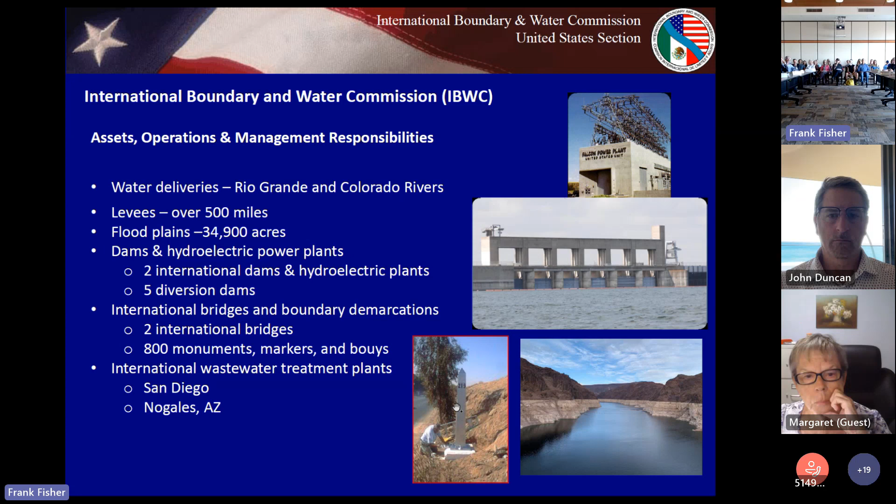The San Diego field office is located within the fence line of the wastewater treatment plant, and most of our time is spent managing the plant, making sure it's operating properly and being maintained, and also the prevention and response to transboundary flows. We have a staff of 5: an area operations manager, a civil engineering position in charge of overseeing the plant, and I have 2 civil engineering technicians.

One of my technicians is here. I want to introduce you - it's Lonnie Connors. Raise your hand there. He's one of the guys that makes everything happen.

Our preference is it does not pump to the International Collector, because a lot of the flow in the river contains treated water. There are two secondary wastewater treatment plants in Mexico, and they dump water into the river, so about half of this flow is already some level of treatment. We don't want to waste our wastewater treatment plant treating treated water. So our preference, and this is how we want to operate, is any flows coming from the river go to pump station PB1A, which bypasses the treatment plant.

So pump station PB pumps to the PB1 pump station or the International Collector. From the International Collector, about 25 million gallons is diverted to the wastewater treatment plant. And then what is treated at the plant goes through this pipeline, the land outfall, and it drops about 190 feet down, turning into the ocean outfall, and is discharged about 3.5 miles off the coast.

The treatment plant is designed and permitted to treat 25 million gallons per day. That treated wastewater is then pumped through this pipeline here, called the South Bay Land Outfall. It reaches a point where there's a structure, then drops in the pipeline 190 feet down into the South Bay Ocean Outfall, where it's further discharged 3.5 miles off the coast.

Yeah, typically down here the discharge is probably 35 to 45, maybe 50 million gallons per day. It varies, but it's a lot.

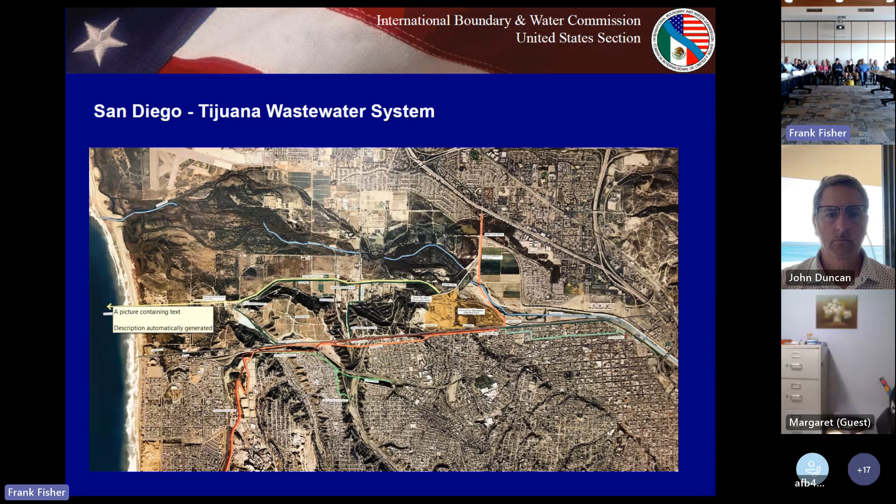All right, so some of the challenges we have. Biggest challenge is the population growth in Tijuana, estimated about 2% per year. And here's a chart that shows the population increase from 1950 up through 2035. So you can see, and that picture over here, this is a typical neighborhood. You know, people will just build houses wherever they can.

I'm pretty sure none of these houses are connected to a sewer system, probably no trash collection. So when it rains, this is the source of a lot of the pollution, and this is liable to be an ongoing problem. So again, 2% per year is forecasted.

57% for 2020. Infrastructure not keeping up. Correct, infrastructure doesn't keep up. Existing infrastructure is overwhelmed, new infrastructure isn't being constructed. All of that.

No, that's the population growth. So there's probably a portion of that it's as a neighborhood, but I think a lot of them probably don't, because of the continued anticipated population growth rate versus no infrastructure improvements, insufficient infrastructure. I agree.

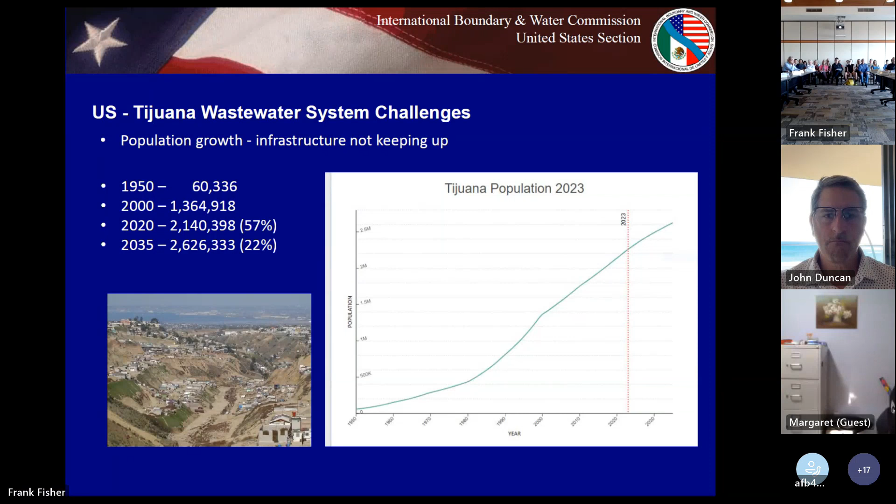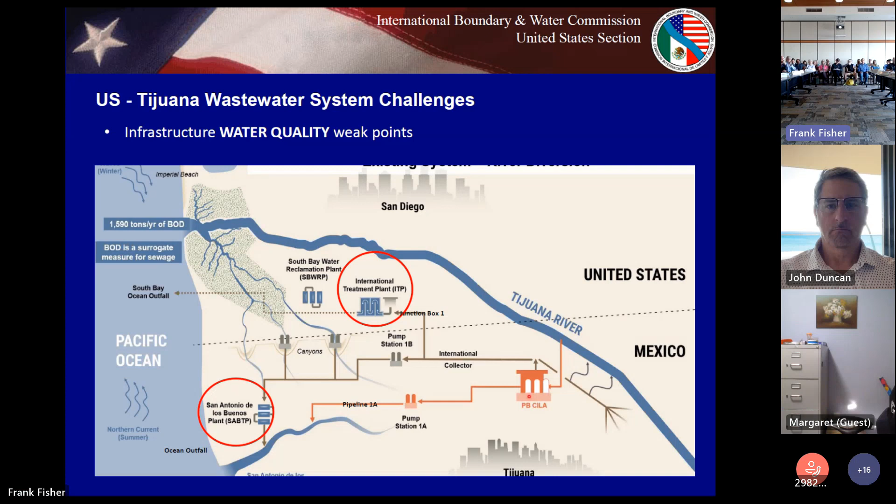Okay, here's the weak points as far as water quality. The slide before that had to do with the flow. So for water quality, we have the International Wastewater Treatment Plant. It's overloaded. We've lost our primary treatment capacity because of the excess flows. It brought in excess trash and rags, and it fouled up the systems and the mechanisms. We're in the process of contracting out the cleaning and repairs of those. And of course, we have the inoperable plant in Tijuana down at SAB.

All right, now we can talk about the plant. The plant is designed and permitted to treat 25 million gallons per day. You can see in the chart on the right, those are the flows per month over the last year, and these flows tell the story. In July 2022, pipeline PB1A was operable. Everything was great, we were getting flows less than 25 million gallons per day. The pipeline broke July 31st, and since then we've been getting an extra 5, 6, 7 million gallons per day, and it's taken a toll on the plant. You can see that from August through December. Now in December, it started going down, because we started getting rains in December. When we get the rains, PB shuts down, which means there's less flow to the treatment plant. And we do it.

Bypass. Is there a certain range where the biodigesters just don't work and you have to bypass? How much flexibility do you have?

So how much flexibility do we have to redirect the flow? How much variance can you accept, or is it just at 25 million gallons you have to bypass and let it go? The question was, what do we do if we get more than 25 million gallons per day? How does the process work? Do we bypass the secondary or whatever?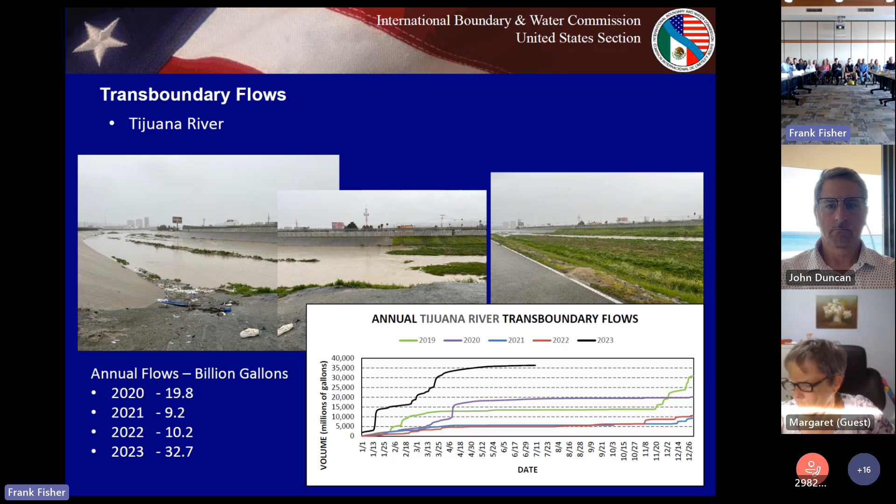Solids come out of the wastewater - they're sludge. So at the end of that treatment, the sludge belongs to Mexico, and they have trucks every day, from 5 to 10 loads a day. They haul that sludge down south into Mexico, and they have a landfill near the old SAB where they spread it out. They mix it with dirt and spread it out, and whatever else happens there, that's all theirs. We're not involved with that at all, but the sludge belongs to Mexico, and they haul it off.

Extensively, and there is a material that is not natural. If you look at it, especially in Goat Canyon, it is super fine. In projects that we work on down there, we've tested it, and basically it's not a natural occurrence - it's not sand, gravel, or cobblestones. It's super fine. I believe it's man-made, some type of sludge.

And then as you go up into the other river channel that goes towards Tecate, if you go through those rivers, there's ponds from developments that you can't even walk up to. But during the rains, there's no stopping that from coming down. And if you go to the mouth of the sloughs right now, it is black - it really is pretty foul, and it goes from the mouth of the sloughs all the way back up to Hollister Road. You sit at Hollister and you smell it.

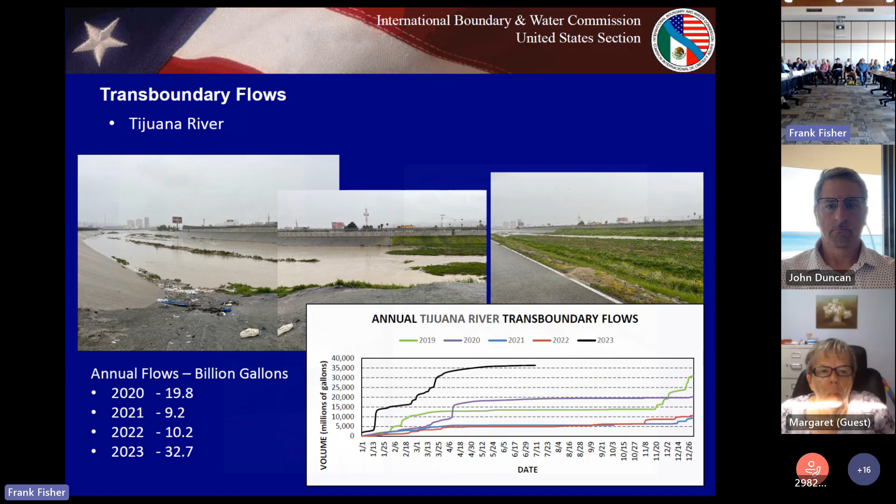I visited the sludge site about 2 weeks ago personally. They mix it in with layers of alternating sludge and dirt, loose material that's there. The comment was that since this is in the desert, they might be able to use it in construction because it's compactable material. But you can see from Google Earth, next to the ponds, piles of what is sludge, layered up. I'm not a scientist, but I see a slope, and I see the ocean less than a mile away, so surely some of that gets there. But from a very uneducated eye, it didn't seem to be anything like the quantity of the sewage that's actually hitting. So in terms of where you're going to put your effort and energy, the sludge is not good, but it's not the biggest problem.

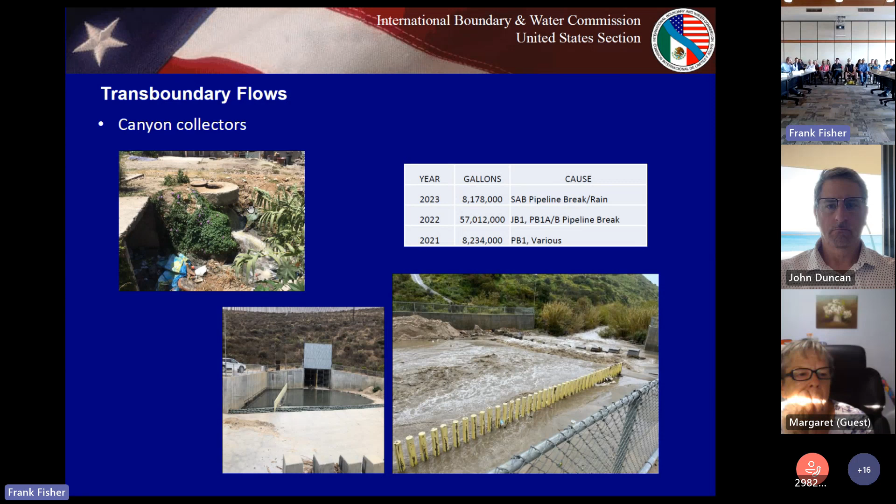So anyway, 2 events had minimal transboundary flows to our canyon collectors. These pictures show a typical source of flow. This is a manhole, and there's probably some rocks or sediment in the pipeline causing it to overflow out of the riser.

Okay, I took pictures of each of our 5 collectors yesterday, and this is what they look like. This is Stewart's Drain—a typical flow we see every day, all year round. I include this photo only to show that Border Patrol was replacing the gratings instead of the typical horizontal and vertical bars. They're using this honeycomb design, which is supposedly harder to cut through.

This is Silva Drain. All of our canyon collectors, we've added sandbags. This is a requirement during dry season, at the beginning of dry season, to give extra holding capacity to these canyon collectors.

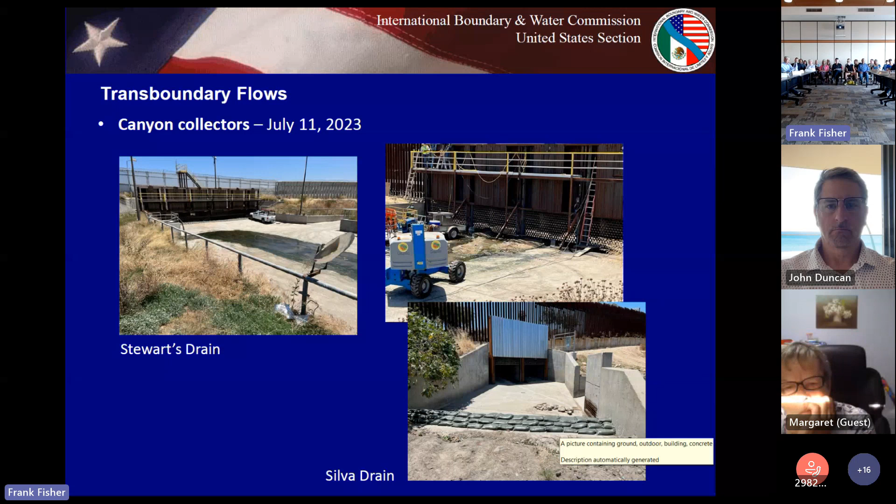And these are the other ones: Canyon del Sol, no flow. Smuggler's Gulch, no flow. Goats Canyon—this is the only one with any significant flow, but you can see it's contained and going to the plant.

Okay, so what we do to respond to or prevent transboundary flows—we have some pumps that, if one of our collectors has a lot of flow, we'll bring in to speed up the pumping and diversion of flow to the plant.

And then we have our sediment berm. Typically at the beginning of the dry season we put this berm up, and it holds the peak flows. This year we've had some trouble getting the sediment berm in place—the flows have been too great—but it's going up tomorrow, and we'll see how it goes with the peak flows. It might be tight, but we're still getting a lot of flow for a sediment berm, and that's one of our main prevention methods, and it's been really successful over the years.

Okay, projects: the JB1 rehab—remember that was the junction box where the valves were inoperable, so we couldn't control the flows. That will be awarded anytime now.

We have a future project for sediment removal in the Tijuana River Channel—we probably have quite a number of feet of sediment in the river. And the levee restoration: here's the Tijuana River channel, this is our north levee, which belongs to the IBWC. There's also a south levee, and this needs to be raised. This picture shows that after one of our rains, there's not a lot of elevation difference between the water level and the top of the levee, so the plans are to raise that.

Minute 328 was an agreement between the U.S. and Mexico for a number of projects. In the United States, that included the expansion and rehab of our wastewater treatment plant, with the goal to double the capacity to 50 million gallons per day. It also includes some rehab necessary to make the expansion successful.

We are still working the numbers on that. We do need more funds, and we're still working on the scope versus the funding sources. We do expect to go out for design bids by the end of this year and award the design portion to a firm the first part of next year. We're looking at one year for design, then two to three years for construction, so that takes us out to about 2027.

In Mexico, there's a number of projects. Some of these we helped fund, some are funded by Mexico. I can say they're not all funded, but the main projects are rehab of PBCILA, upgrading the pumps, which increases reliability, and also rehabbing pump station PB1, again replacing pumps for reliability.

There is a project to rehab the international collector, which has that crack, supposed to start this summer. Repair pipeline PB1A - if we get that online, it'll solve a lot of our problems. We're still pushing to have some kind of date to start that. Right now they're talking about a year from now, which is really unacceptable to us. This has probably the highest level of attention to get that started.

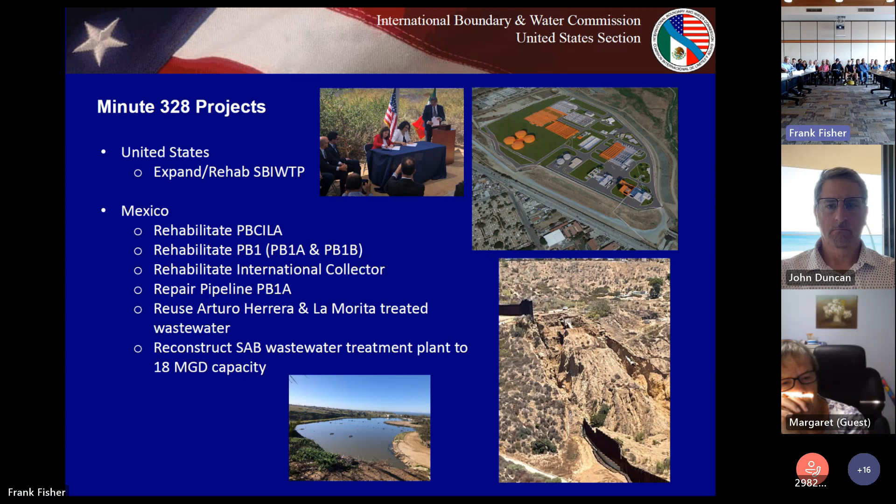We also want Mexico to start reusing that treated water instead of dumping it into the river and adding to the load on our plants. And then there's a reconstruction of the wastewater treatment plant in Mexico, increasing that from 12 million gallons per day to 18. That is supposed to go out for design this fall. So that is a project that is going to happen, and it should be online in 2026. So there's a lot of effort going on, and I think I will stop there.

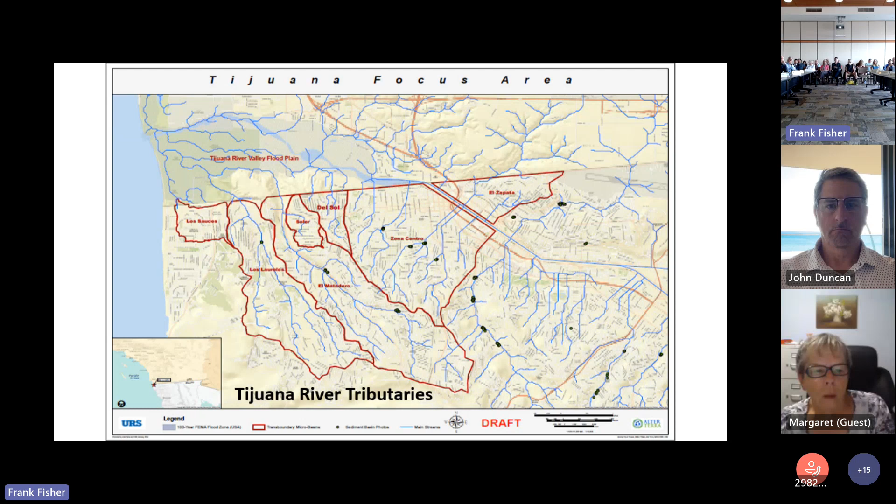I'm going to show some maps to reiterate why we're getting all this trash. These are the tributaries that connect to the Tijuana River. At one point we needed to correct this because the maps were done wrongly — we needed to incorporate all the changes in topography that happened in Tijuana over the last 20 years. So this is the new map, showing the Tijuana runoff infrastructure. I wanted to put the two maps back to back because this one mimics the tributaries — in other words, these tributaries are being lined with concrete, and that's one of the reasons why we see all this trash.

The velocity of the water increased dramatically. You see all those dots on the map — they represent the sediment basins. There are 26 around the city of Tijuana, and that shows progress. However, now people are dumping trash in the sediment basins, which were not designed to handle trash, only sediment. So that trash ends up in the main river.

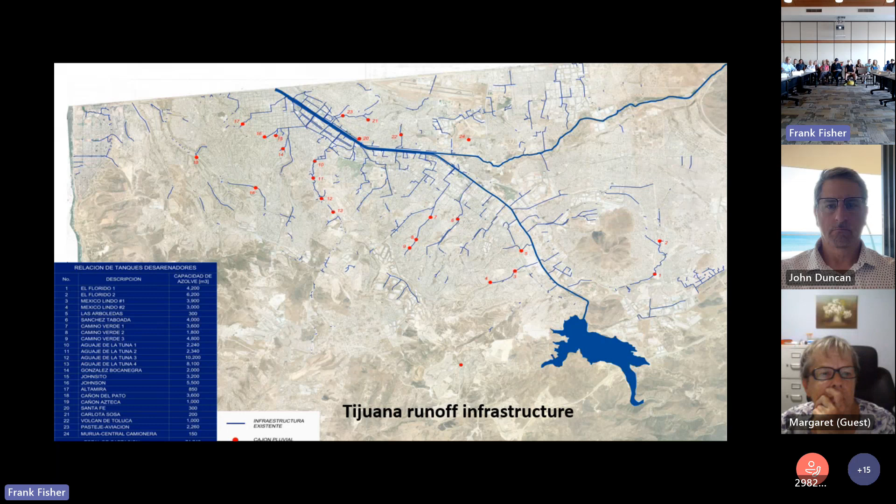We did this map at UCSD in 2007, when the population was below 2 million, and the footprint of the city was this. Nowadays the footprint is a lot larger — it's passed these hills over here, and it almost reaches the city of Tecate, which is around here.

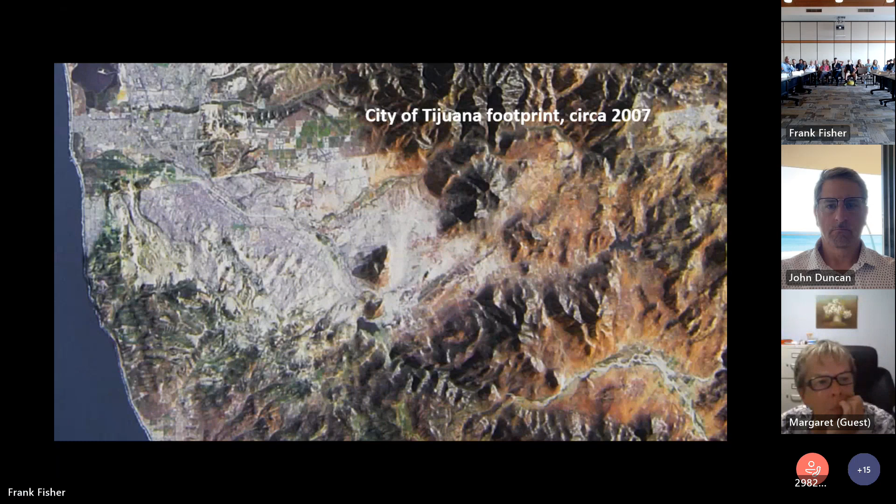And then this is the Rodriguez Dam — now totally surrounded. The river is the lowest point in this hydraulic topography of the city of Tijuana, so everything connects to this area. As you can tell, this is Playas de Tijuana, and this area remains empty, which means that whatever you put in a channel or in the soil ends up in the Tijuana River eventually.

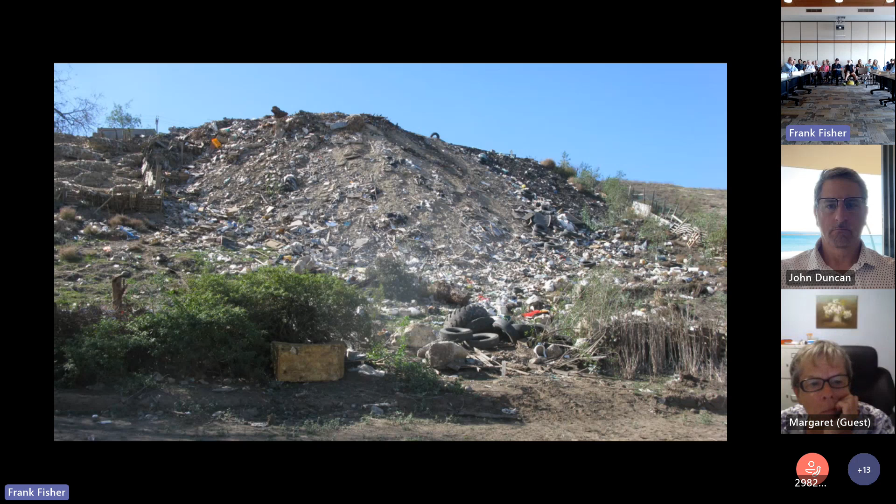This is one of those smaller maquiladoras, large maquiladoras. They mostly behave well - they collect the trash, recycle it, or transport it to the landfill. Smaller companies that serve those maquiladoras are under the radar screen, and they just put the trash behind their property, almost always in a canyon, in a creek.

This is a typical example of something that has happened since after the war ended. Tijuana has been growing pretty fast, and most of the neighborhoods are the product of illegal acts of urbanization, no permits. It's cheaper actually to build and then ask for forgiveness. So there's a process - you go back and say, I didn't ask for a license. Okay, you pay the fee and you get a license afterwards. So when you see these neighborhoods being developed, immediately you see trash deposited in every place.

We know a lot about trash. We've been studying trash for a long time, so we know everything, where we can find it. We have maps of all the illegal dump sites. We know exactly what is in there, and we make observations - it's very hard to measure the amount of trash, so it's only through observations. We cannot gauge it like water. It flows, but it's difficult to separate.

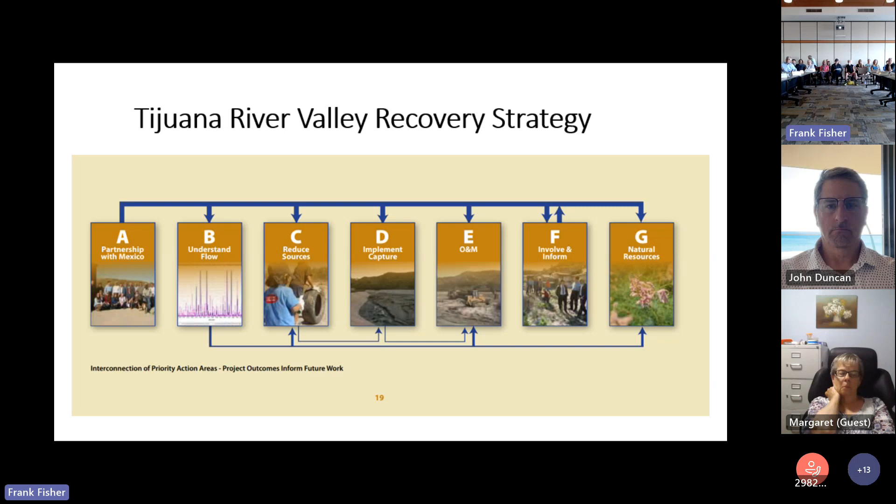It's going to take a while. I'm going to explain more about it. Capture it before it crosses the border. Then we need to find resources in Mexico to maintain and operate landfills. We want to inform the community in Mexico and here. These are priorities, and it seems like the last priority is to conserve natural resources. It's not - it's just that there are other more urgent matters.

We're going to install some barriers to control the floating trash. We're not going to take care of solids like tires or sediment. The trash booms we're going to deploy are not designed to do that.

This is our project area. It's actually the boundaries of the commission, the International Boundary and Water Commission. This is their land, and our project happens right there.

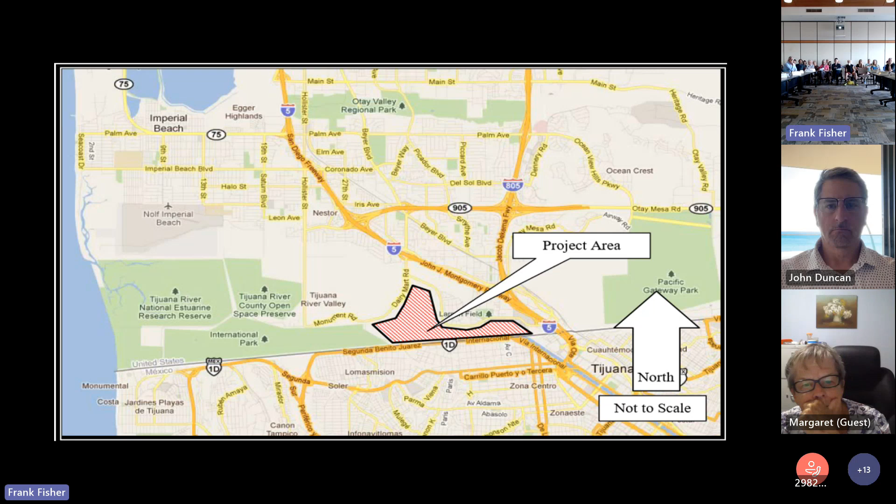The purpose is to place these trash barriers called trash booms. They float and collect all the floating trash. I'll show you some examples. The reason we are putting it here is this is the concrete bank after crossing the border.

But IBWC and Border Patrol manage this side. They have multiple operations per day, and we couldn't interrupt the flow of vehicles. So we moved our trash booms a little bit behind, a couple thousand feet.

These barriers float and collect the trash. We have two sections, one here and the other one needed as well. These are a different type of design because the pilot channel is flowing year round, so we also want to collect that trash.

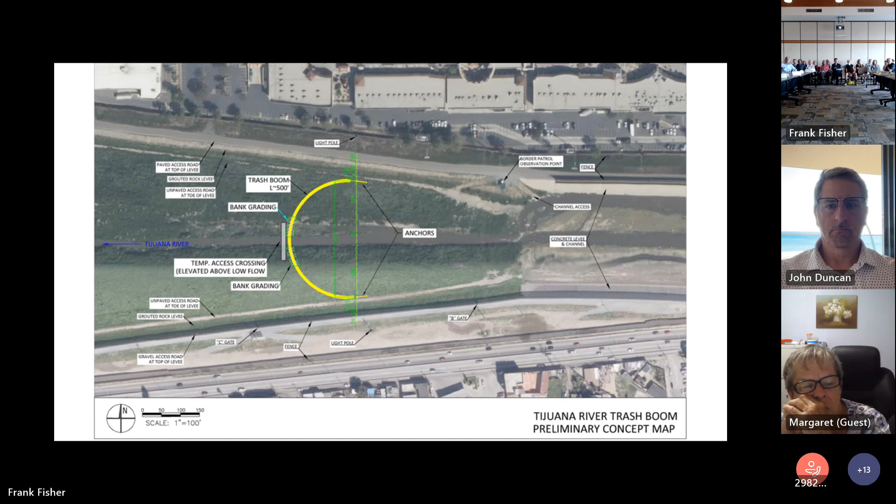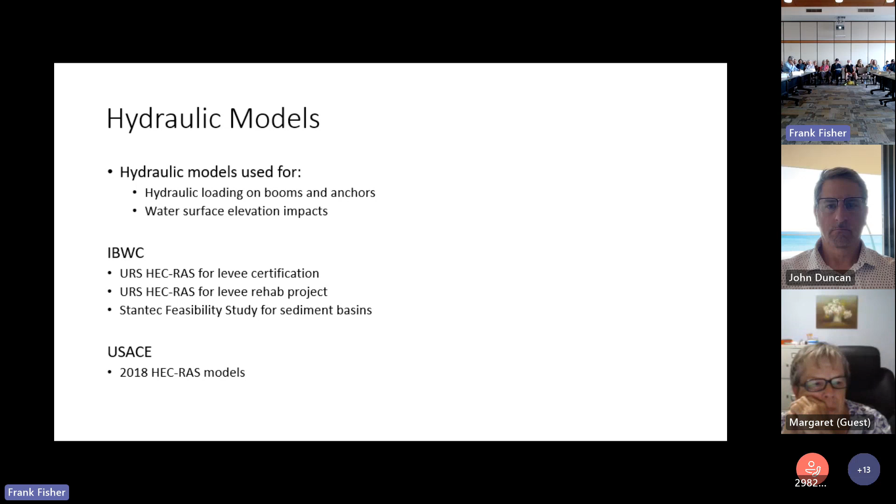We use hydraulic models, and Morgan already talked about plans to improve the levees. So we're using exactly the same hydraulic models.

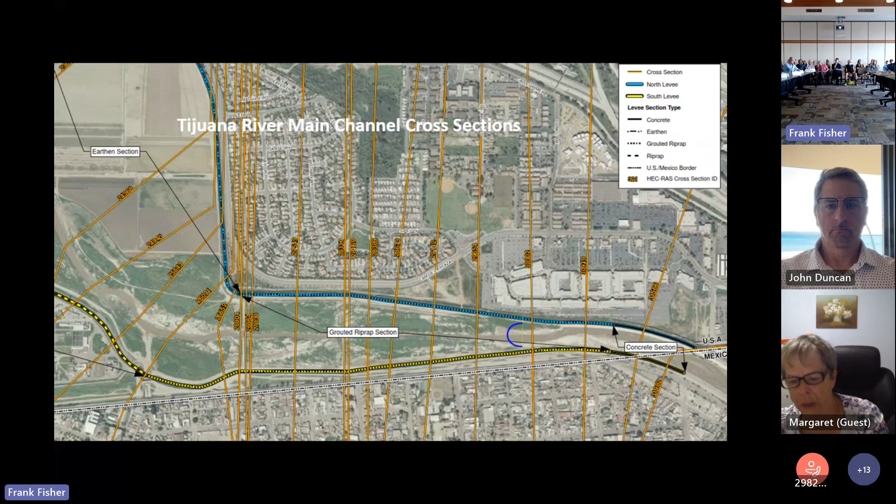We're going to place them here. We care about how the water behaves in this area along with the trash, to prevent trash from flowing here. What happens is that trash ends up in many places in South San Diego and Imperial Beach.

Those are the models we're using. This is a profile of the trash booms that we're currently using at Smugglers. When we installed and deployed them in 2019, they've been behaving really well.

One thing about these trash booms is that this shell is made out of high-density polyethylene collected in Tijuana at dump sites. We're repurposing that trash into sheets that form these shells.

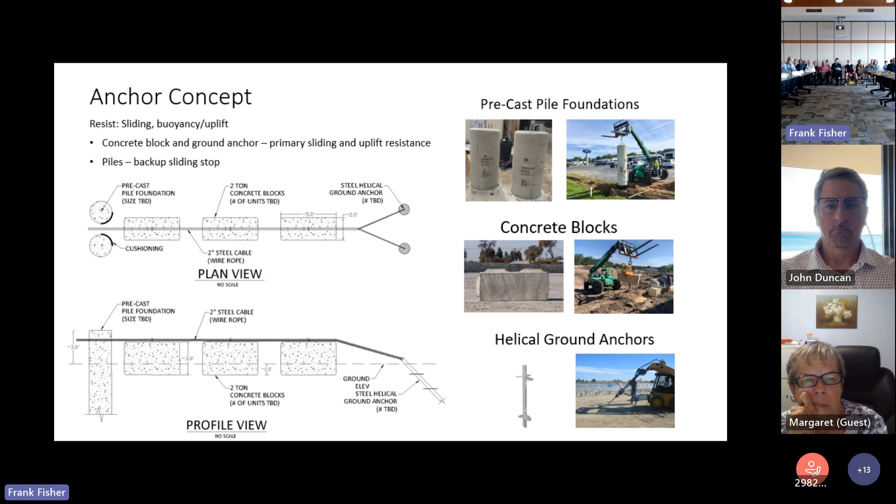We deploy them using heavy equipment. We're going to install some anchors. We have some restrictions about placing anchors inside the riverbed, so we are exploring ways to do it without excavating.

This is kind of what we're going to do. We're going to put a column and then some gravity anchors to hold those trash booms in place. We need to avoid the drag by having heavy blocks of concrete on one side. And since water is going to rise, we have a column to prevent the trash booms from moving upwards.

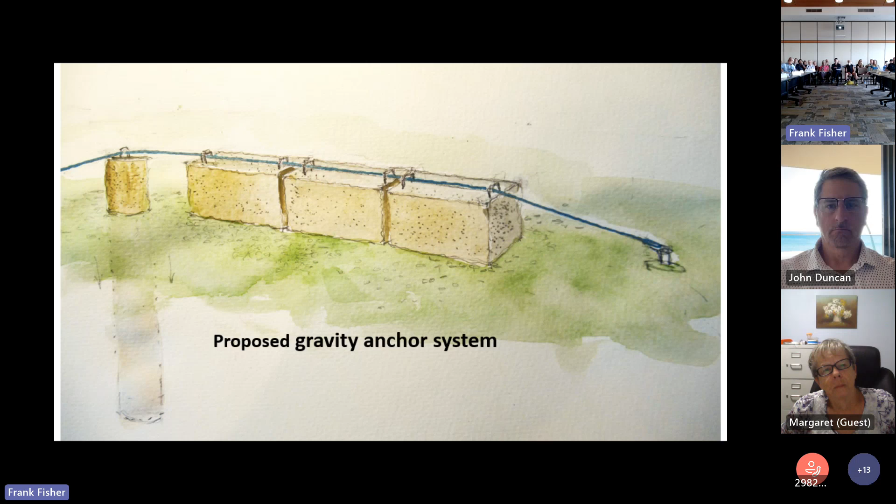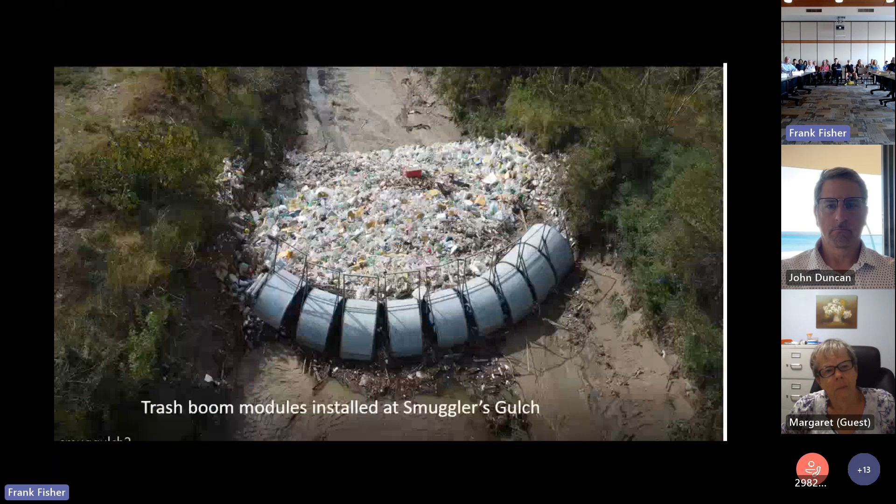That's a typical way we install them. This is a picture taken at Smuggler's Gulch in 2022. As you can see, this is floating trash, only floating trash, and it's a lot. I don't know exactly how many cubic yards, but probably a couple hundred cubic yards in one single event. So we're collecting large amounts of trash every time it rains.

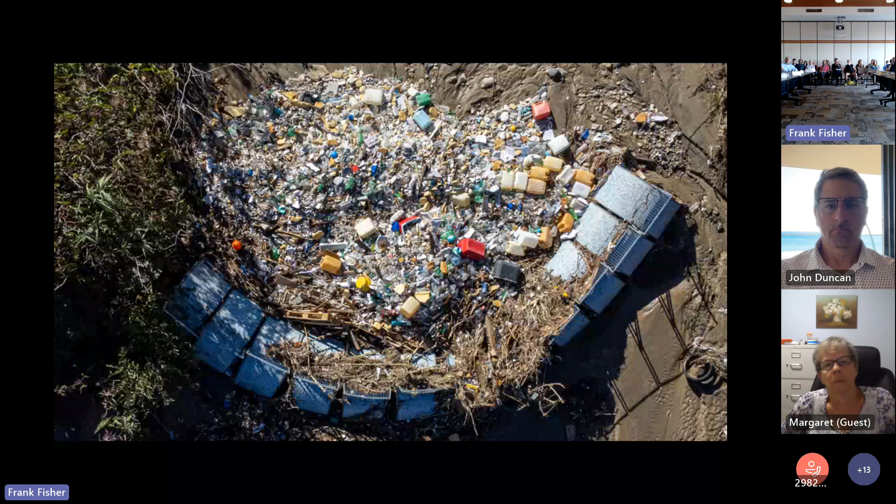Those colorful objects here are made out of high-density polyethylene, which is what we're recycling and repurposing to build the trash barriers.

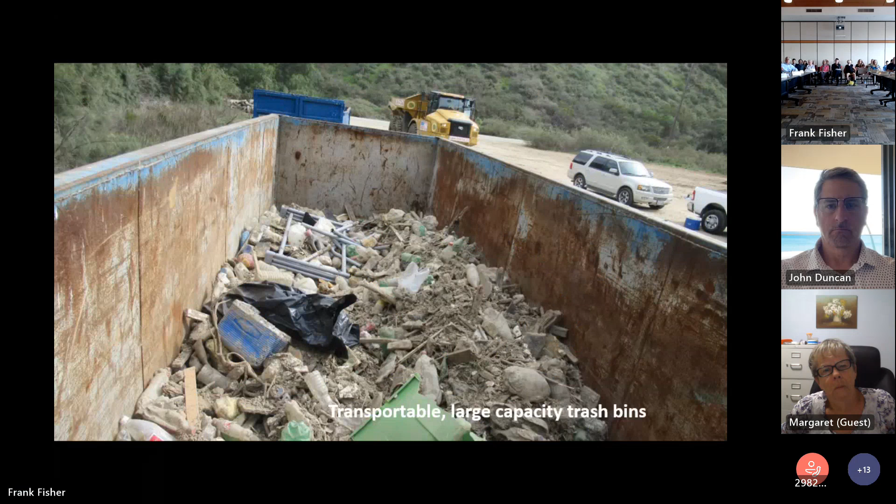The trash is going to be placed in trash bins. This is the area, the footprint where trash will be collected. It's pretty large, 6.2 acres, probably more. And I'm sure it's going to expand into Mexico. I'm already hearing complaints from Mexican authorities that the trash is going to accumulate on their side of the border. So be it.

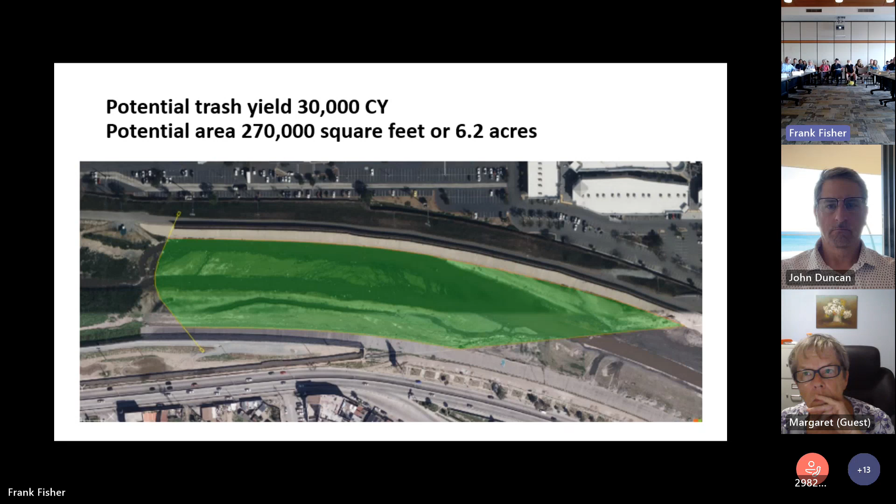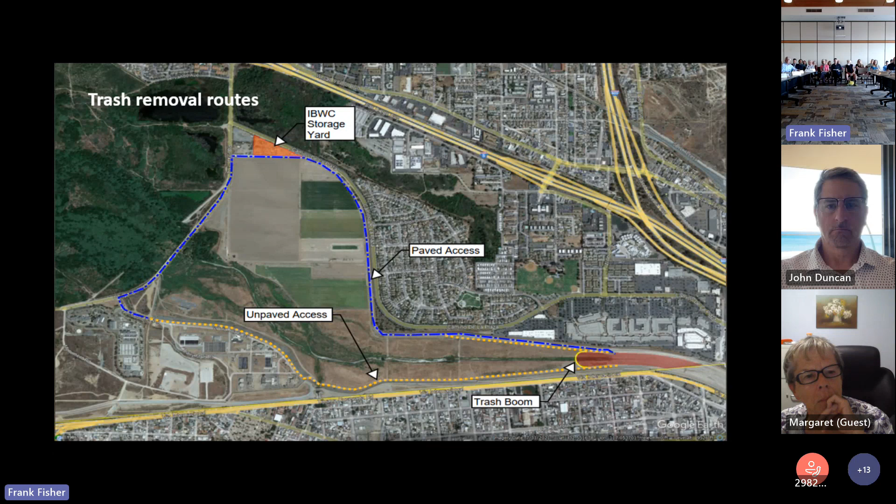Then the trash will be moved from this area, in a couple of routes, to a staging area, and finally to the Otay landfill. We're going to contribute to these parks that are going to be built with above the trash.

That's not all. There's a research component, and it's not just another study. We've done so many studies before, but this time we're going to have my assistants join families that go shopping. We want to know exactly what they're buying and what they're throwing away almost immediately, if there's a way to identify the routes of the trash.

What we're trying to build is an algorithm so we can understand how much trash we can expect after every storm event. By calculating the amount of water flowing in the system, thus understanding the behavior and the mishaps of the authorities at the municipal level, the state level, and the federal government of Mexico, we might be able to come back to them with some suggestions.

It's another country, so we cannot impose on them anything. But locally, we have been successful in making them do things.